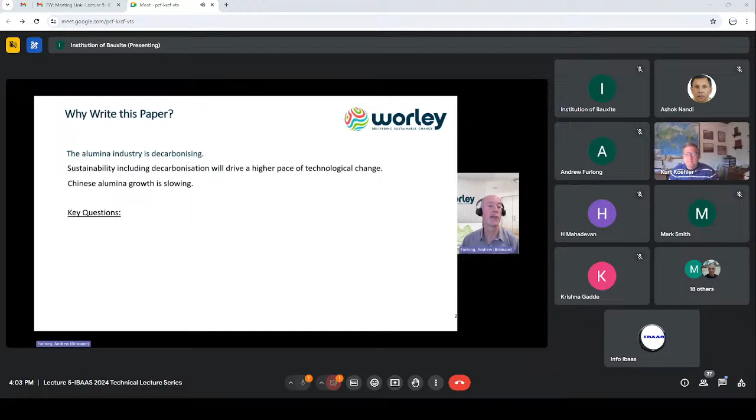And the second very significant trend is the huge growth that we've had over the last 2 decades in the alumina and aluminium industry in China is now slowing somewhat. Not that they're not growing, but it is slowing. So out of that posed two key questions we wanted to answer, which we'll try and cover today. They're very broad questions, in a fairly high level manner, given the time. And those questions are, in this context of decarbonizing and having production growth, what would your new refinery look like? And secondly, where should your new refinery be located?

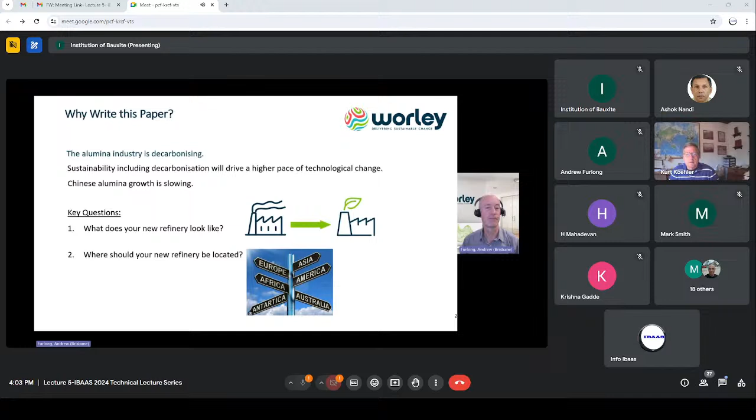A bit of context around the decarbonization, which we're all pretty familiar with, is that 2050 requires rapid global decarbonization, as per this graph here from the International Energy Agency, showing a massive drop-off in fossil fuel usage to 2050, particularly between 2030 and 2040. And it's similar when we talk about the aluminium industry.

The International Aluminium Institute has provided its own scenario that aligns with net zero, the 1.5 degree scenario, and that shows a huge fall off in emissions from the industry to 2050. Again, in that 2030 to 2040 period particularly, which I'm terming here Horizon 2, and that time frame, probably late 20s and early 30s, is probably the time frame of most focus for this presentation.

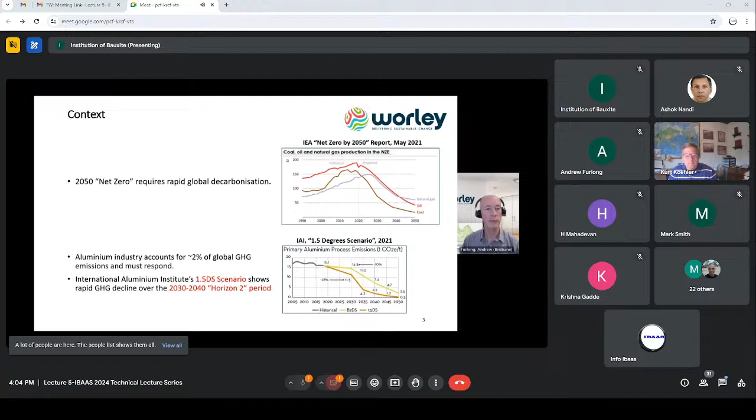So I want to do a little bit of looking back before we look forward. We're obviously trying to give some predictions overall here about the future, and so there's definitely some crystal ball gazing going on in this presentation, but we think it's not too far in the future, and it needs to be taken seriously for the decisions of today.

But back in 2018, only 6 years ago, Worley had a separate paper where we were speculating on 3 possible scenarios for what a refinery might look like 40 years from then, so in 2058. So a long way away, but the 3 scenarios were a business as usual scenario, where there's just evolutionary change that we're all used to, continuous improvement in technology; an energy center scenario, whereby refineries are moving to be located beside low-cost energy sources, in particular low-cost renewable electricity; or a local renewables scenario, whereby refineries are pushed to stay close to the bauxite mines because transportation has been decarbonized, but decarbonized transport would be very expensive, and therefore they just use whatever renewables are available locally to them by the mine.

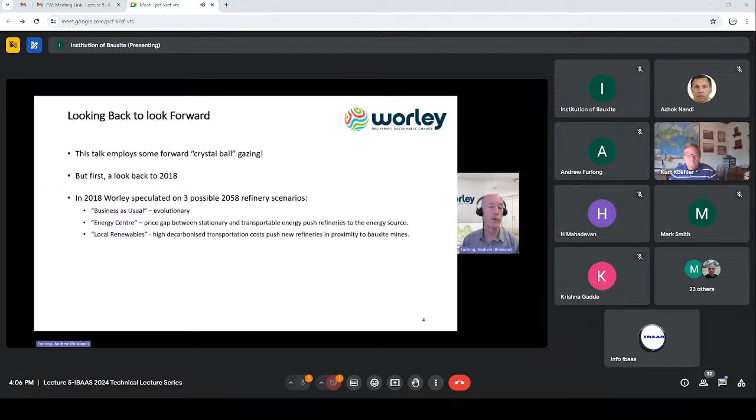So 6 years on, there's been a lot happening in the energy transition since 2018. There's been an acceleration. So what learnings can we take from that? What we see is that for each of those scenarios, we can see elements of them playing out, maybe less so the local renewables scenario, but there was an element in the local renewables about this driving batch operation of some parts of refineries, such as calcination and evaporation. And we see that's potentially possible in the future when we start electrifying refineries, as penetration of renewables gets very high in grids. But nevertheless, the energy center seems to be the more favored medium term.

And the reasons for that are, there's been the huge acceleration in electrification as regards the energy transition, the rollout of wind and solar, etc., is ramping up, and costs of renewables are ratcheting down faster than any other aspect of the energy transition. Also, concentrating industry in an energy center is very aligned to the large scale rollout of infrastructure that's going to need to be rapidly delivered to meet net zero by 2050. And thirdly, concentrating industry in one location is more aligned to reuse of waste products from one industry as a feedstock for another.

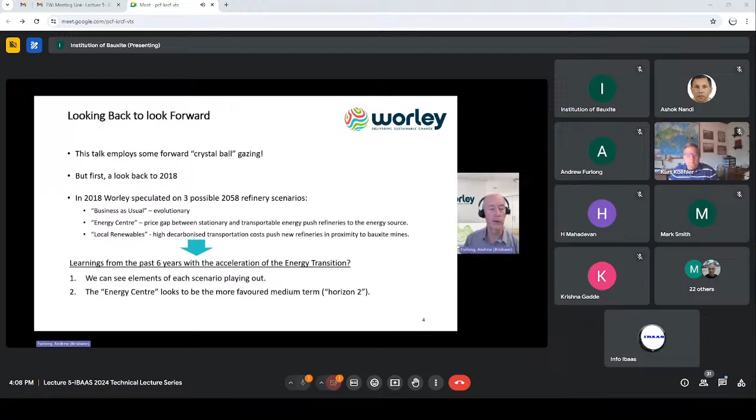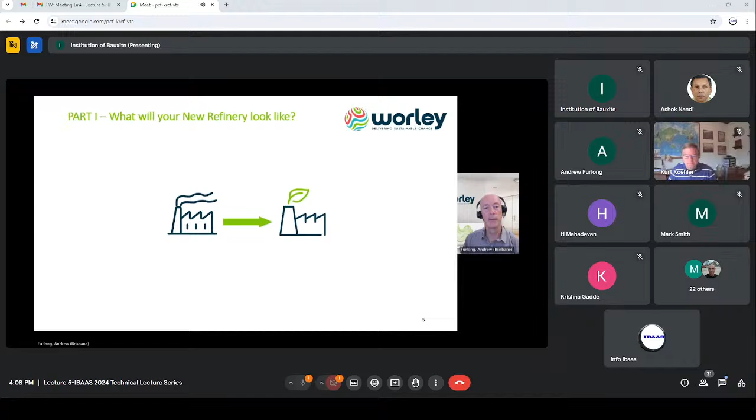So moving on to, let's say, part one of this talk, what will your new refinery look like in a production growth but decarbonized scenario? And first thing to say, despite all the talk we've already mentioned about declining renewables energy costs, overall, in an electrification scenario, which we see as the most likely, because of all the energy transition technologies, they're the ones that are going to be dropping in cost most, and we also see those technologies as having the greatest opportunity for

efficiency improvements. But despite that, what we'll see in the future, we believe that the alumina industry's energy bill is going to become a lot more important, and this is going to actually incentivize energy efficient technology. When I say a lot more important, what I mean is actually energy costs could double.

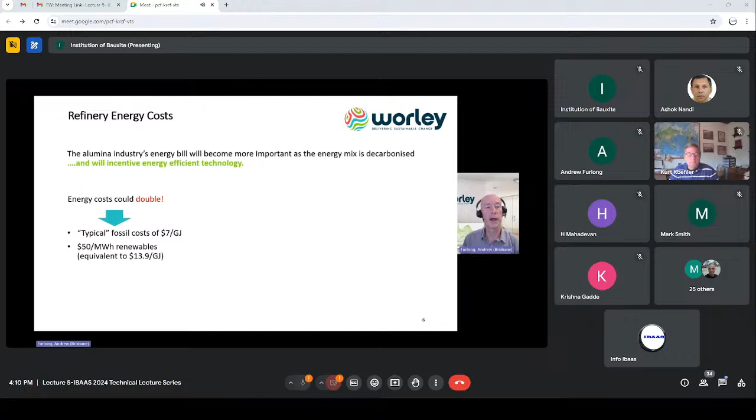And to put that in context, as an example, I've come up with a typical fossil fuel cost of $7 per gigajoule. There's no real typical cost across the industry because it varies by location, but to pick a line in the sand, I picked $7 per gigajoule, and then I compared that with a reasonable renewables electricity cost of $50 per megawatt hour, which is equivalent to basically $14 per gigajoule, which is double our $7 per gigajoule.

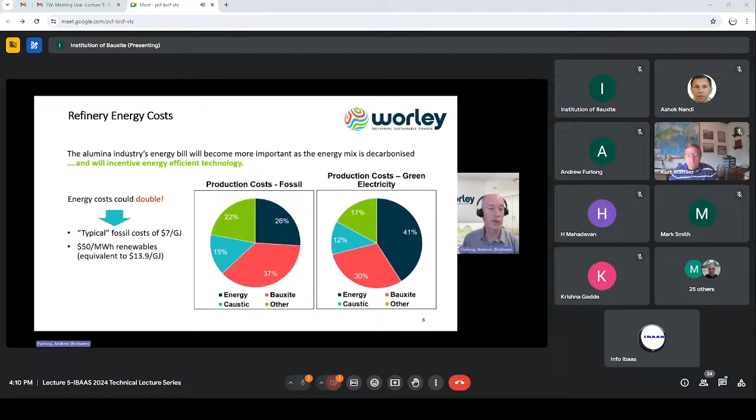And so what does that do to our production costs matrix? Well, production costs today in a fossil fuel scenario, I've come up with my own split here, whereby in black I've got the energy costs, also shown bauxite costs, caustic costs, and other costs. Of alumina production, about a quarter of the costs are energy costs. But where we have energy costs doubling, it jumps to over 40% of alumina production as energy costs. So obviously, we're going to be paying a lot more attention to it in the future, and it's going to be driving energy efficiencies.

So where are we heading overall with this? What we see is waste reduction and energy transition driving very significant changes in refinery technology, and that's going to dramatically alter the inputs and outputs to and from refineries. We're used to the historical setup with large amounts of fossil fuels, in this case coal and gas, being inputted, a lesser amount of electricity, caustic and water, bauxite inputs, and significant amounts of CO2 emissions, water outputs, and heat losses from a refinery.

But in the future, those fossil fuel inputs we see as being displaced by a larger amount of electricity as the energy input. The water usage will drop dramatically, water output will drop dramatically, heat losses will drop dramatically, and we'll see a lot of energy and waste heat being recycled within the refinery and residue being reused. Now, this chart on the right focuses on a decarbonisation scenario. I wouldn't be surprised to come back in 10 years and be talking about a lot of work being done on bauxite inputs to potentially reduce the bauxite input to the refinery, or even caustic. But that's for another day.

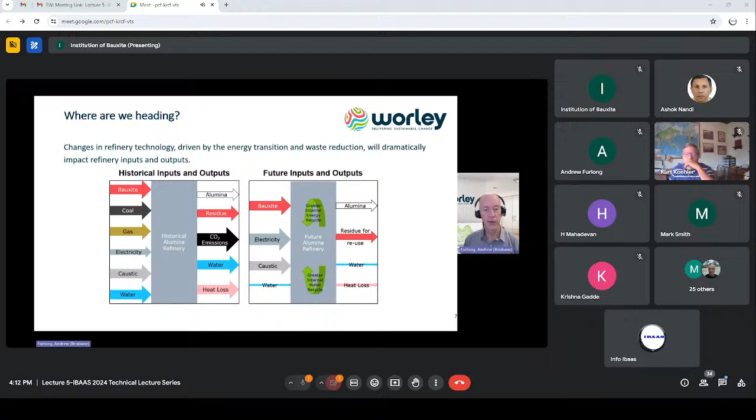Moving on from the last slide, getting a little bit more focus on one aspect of the energy to the refinery and where we are heading. I'm taking the example of process steam, which is of course the largest energy usage in a refinery. And what we see with the technologies that we're looking at, that process steam energy could reduce by over 70% compared to a typical refinery today, which I'm showing as 5.5 gigajoules per ton process energy usage, or around 60% versus greenfield best practice. And so that's huge energy savings.

And at the same time, that technology driving those energy changes can drive complete elimination of process steam CO2 emissions, and also an 80% reduction in refinery water consumption. So it's really a massive change, and this graph is showing that there's a series of waste heat recovery options available to refineries that, if taken advantage of, can dramatically drop the energy usage of steam, and in this instance, those technologies are electrification technologies.

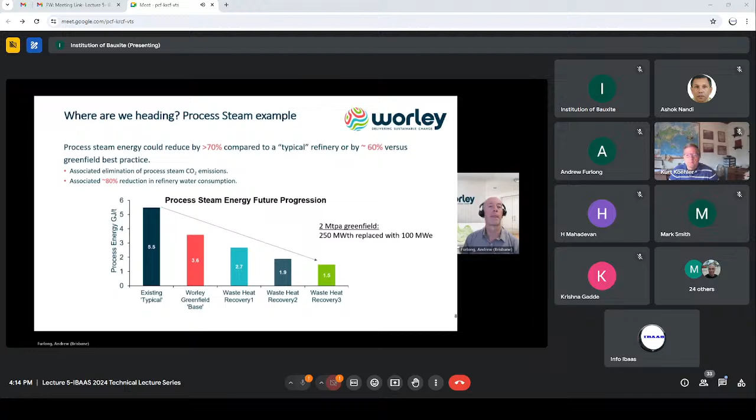I've tried to illustrate in this, there's many technologies that could come into this, so I tried to put them here onto one slide, animated slide at a high level, and I'm showing here a Bayer circuit where it's fed by steam as the energy source from our steam plant or boiler plant, but we've got waste heat being lost out cooling towers or out stacks and water associated with it. And we've obviously got a calcination process that also loses waste heat and water out of stack.

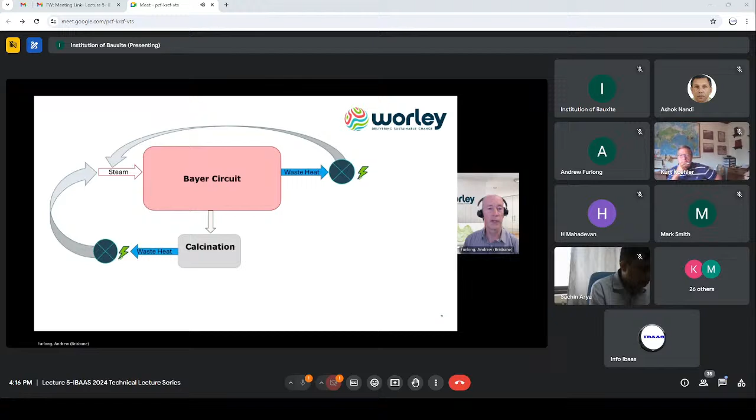But in future, we may not need this fossil fuel boiler, and we may not be losing that waste heat out through those sources. As a matter of fact, we will recover that waste heat via some means of vapor recompression technology, preferably electrically driven, and so preferably green electricity driven to avoid the CO2 emissions, and that will recycle that heat. Recompression will provide the steam to the Bayer circuit.

At the same time, we could see that pure high temperature refineries could become less common as they convert, or newer high temperature refineries become more double digestion style. Double digestion would be where you have a mix of low temperature and high temperature compared to just pure high temperature. And the reason for that is that these compression technologies for recycling of waste heat are more efficient and lower capex when they have to compress to lower steam pressures. So obviously high temperature refinery means high steam pressures. So that's why it's preferable to have a low temperature refinery when you're recompressing waste vapor.

And in actual fact, even for a low temperature refinery, this will favor single stream digestion versus dual stream digestion, where you have separate heating of liquor and bauxite slurry. For the simple reason that the steam pressures required in single stream are only about half that needed for dual stream digestion.

In addition, for security of energy supply and maybe to take advantage of some arbitrage in day-night electricity pricing, we could see some elements of long duration, large-scale energy storage being installed at refineries, electrically heated, and from the thermal energy storage, we could raise steam for the Bayer circuit, or we might just take the heat transfer fluid, let's say molten salt, and exchange that directly against the process slurry or liquor in the Bayer circuit. So again, not requiring an actual steam plant per se.

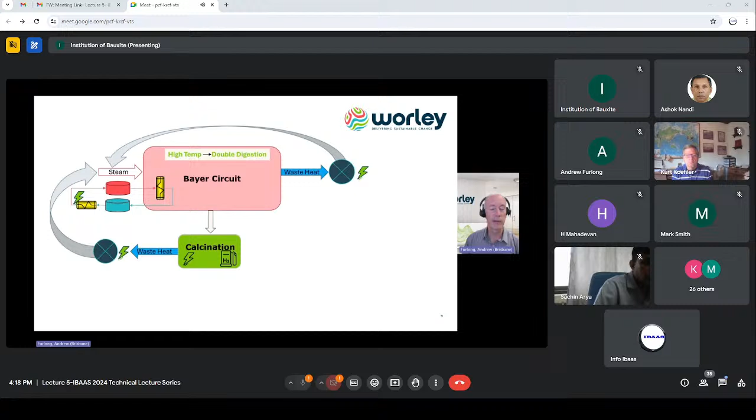Next up, we'll try and decarbonize calcination. Now, existing calcination plants, we may be able to retrofit hydrogen. It may be a while before hydrogen prices allow us to do that economically. Potentially, we can retrofit electrically. That could be more challenging. It may be able to be done as a partial retrofit, but a full retrofit could be more challenging.

On the other hand, there's already demonstration plants out there for a next generation calciner, electrically driven, and we think this is a very interesting future technology. There won't be any need for combustion there without a fossil fuel, so it also opens up different ways to envisage or reimagine heat recovery and heat optimization in the calciner.

And also there may be opportunity with these calciners to not necessarily be as constrained as the existing calciners are, having to operate 24/7. These calciners may be more flexible and able to start up and shut down more frequently. That might allow them to align better with variable renewable electricity, say day-night cycles, which will be interesting to optimize for electrical pricing, but also maybe allow hydrate storage as a cheap form of storage for those day-night cycles, and that might also allow for extra flexibility, some element of hot alumina storage.

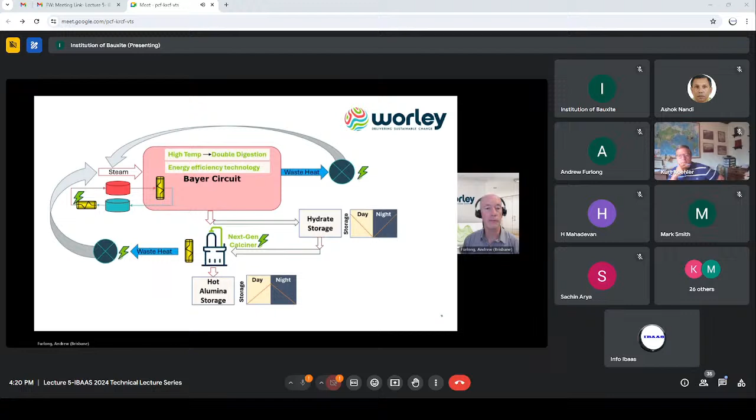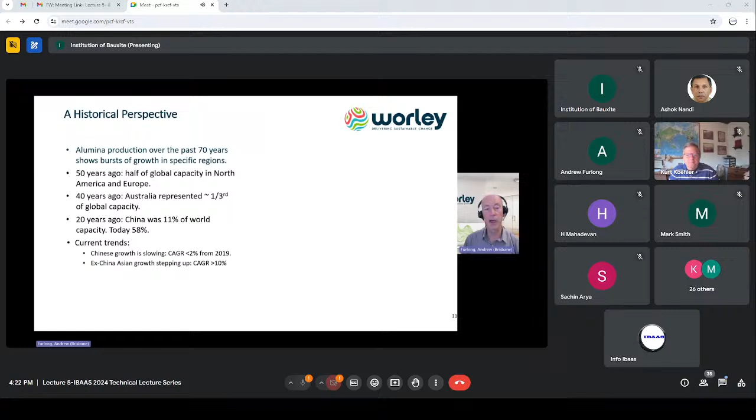So what's driving these bursts of growth that we've seen in different regions? Well, there's a variety of key drivers that affect the suitability of different locations. And really, it's the changes in these drivers over time that's led to the historical patterns that we've seen. And no surprises, the changes in these specific drivers is what's going to drive this in the future.

I've listed at a high level, the drivers are CapEx, OpEx, sales, you know, guaranteed sales for your alumina, risk, and strategic reasons. They can all be broken down, which I've attempted to do here, into a series of smaller bullet points. In risk, maybe not so important in prior decades, but ESG has now been added to the list of things like risk financing and geopolitical risk. ESG has obviously become a big item and will only be growing in decades ahead.

So some examples where these have played out: we've seen on the strategic side very strategic government support to underpin the growth in the Chinese aluminium value chain over the past few decades. Australia, where I'm based, that industry was really underpinned by low OpEx, bauxite and energy. But when we look forward, the future growth now appears to be hampered by high labor costs. And in Guinea, there's potential refinery activity on the horizon, but to date, despite the huge bauxite resource, there's been very little alumina production there. Obviously, the political risk has been a deterrent to date.

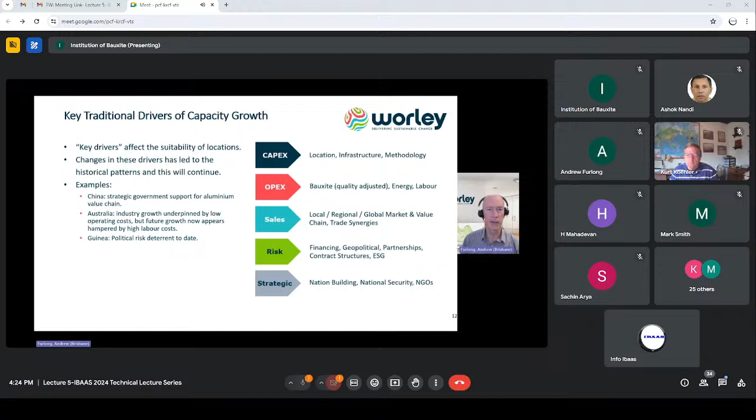And quite a startling statistic, I think, is that we're all familiar with the G7, those advanced economies. There's an equivalent group of emerging market economies called the E7, which are Brazil, China, India, Indonesia, Mexico, Russia, and Turkey. The E7 were half the G7 size in 1995, but by 2040, they could be double the size. And by 2050, 6 of the 7 largest economies could be what we term today emerging. So we can see that Asia, Africa, Latin America are the strongest growing regions.

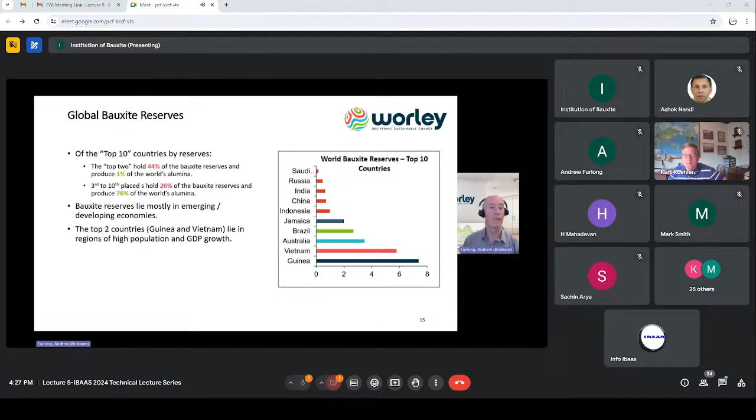So going back to how the energy transition might impact refinery location. Well, what we see is, and going back to the energy center theme, we see that new refineries will be more likely to be located in regions that offer those energy centers. So what I mean by that, they offer low cost carbon-free energy. And also, if they're near bauxite deposits, that'll be a huge advantage at the same time. So what this does, obviously, this provides an energy cost advantage while limiting bauxite transportation cost penalties.

Additionally, there's a lot of talk in the world today about supply chain needs, securing supply chains. So if these locations where the refineries are can also address regional supply chain needs, that will obviously make the opportunity more attractive.

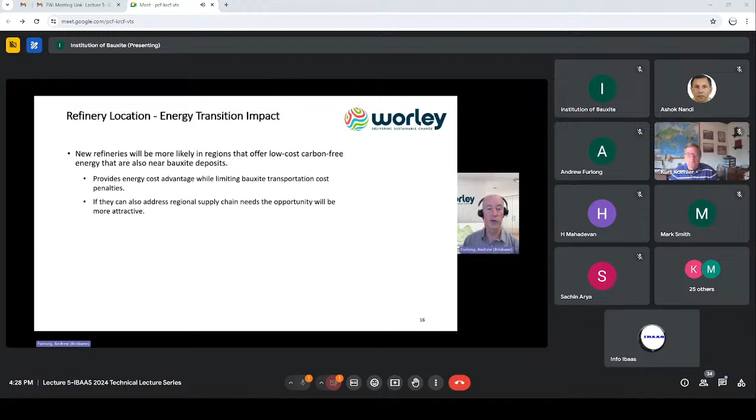So I've pulled this chart together. It's a chart showing the solar and wind technical potential in any country as a multiple of the energy demand. And it's divided the world up into those countries where it's super abundant, which means the solar and wind potential is more than 1,000 times the energy demand today. Super abundant or abundant, replete or stretched. And again, it really lines up quite well with the GDP graph, that it's mostly the emerging countries and the same regions that are coming out with the highest multiples here.

So really the message is the renewables opportunity appears strong in emerging markets. Now you might say for Africa, the reason why it stands out is because there's such a low energy demand today. But having said that, 39% of the global solar and wind technical potential actually lies in Africa. So that actually demonstrates the opportunity there.

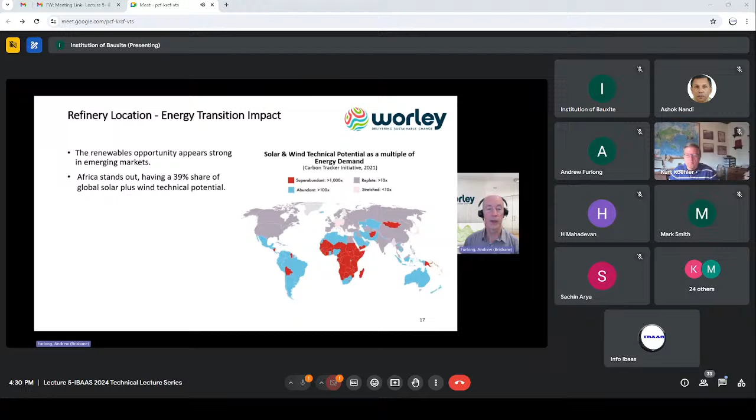So I'm just coming to a few charts here at the end of this first presentation, and really when we put those drivers that we were talking about before together, that drive the location of a refinery, they come up with what we're terming here a recipe for a refinery location, and they combine to create a recipe for development in any given country or region. So I've put together some subjective examples of what that might look like in the future for certain countries and regions. They're not precise. They're just, as I said, subjective. And I welcome anybody here to try this for themselves and see what numbers they come up with.

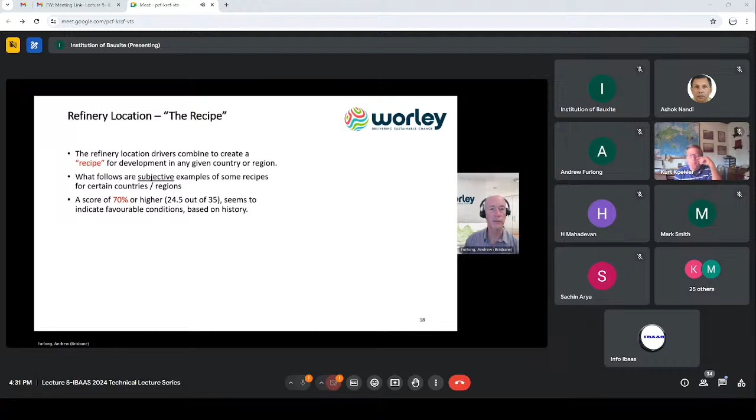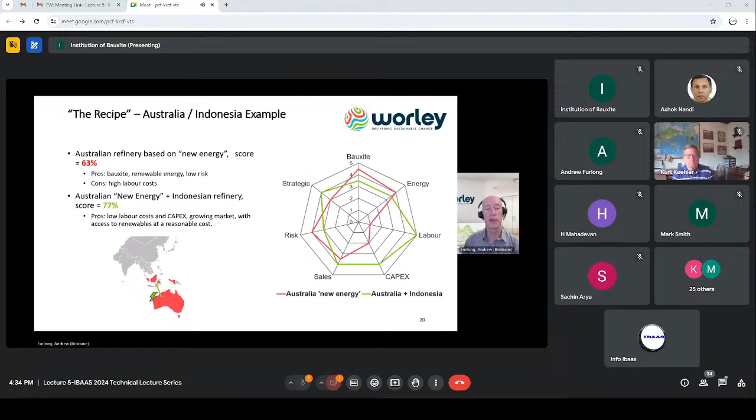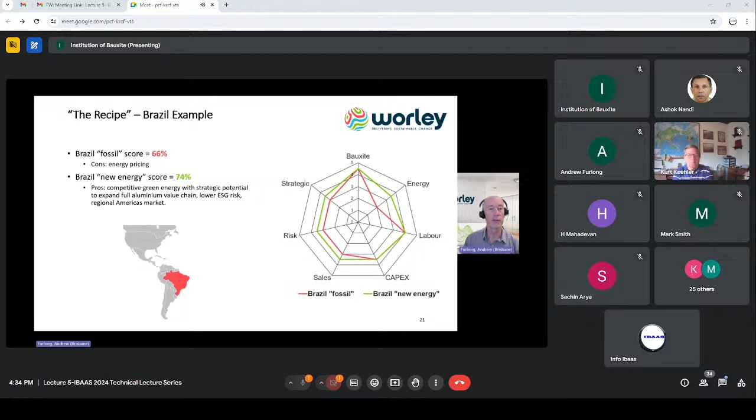Brazil is quite well endowed with green energy, so it'll be very competitive. And actually that drives maybe strategic potential to expand more into smelting and open up the full aluminium value chain. Obviously lowers future ESG risk and might open up more the market for providing low carbon alumina and aluminium into the Americas. Finally, I have included India here.

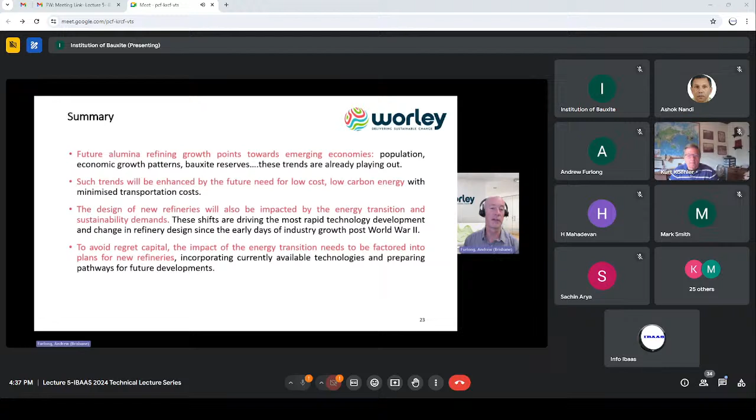I'll now continue with a few slides on the technical piece on evaporation retrofit with mechanical vapor recompression, a pathway to decarbonisation. I'd like to thank Brad Hogan, my colleague, who put these together.

So the summary from this slide is really that, as we all know, most of the energy in an alumina refinery is on process heat, whether it's as steam or calcination, which makes the carbon emissions hard to abate. So with that comes some challenges, because if we do have to transition to a different emerging technology, that might have some uncertainty and some technical risk.

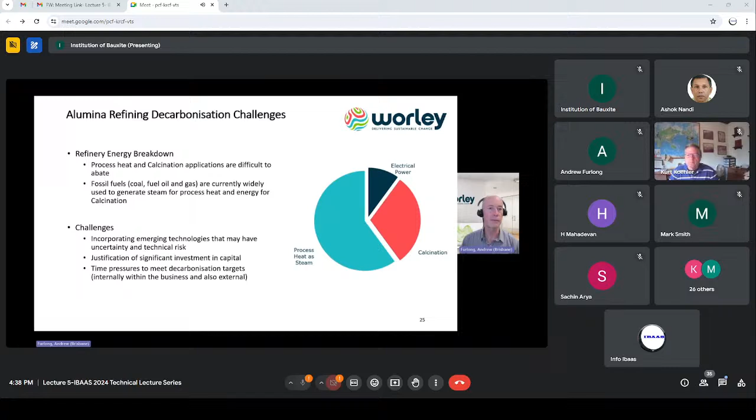And with that, there's always a justification if there's going to be an investment in capital. And depending on the company's commitments or the country's commitments, there also could be some very strong time pressures to meet the decarbonisation targets. And with that, we see a variety of different decarbonisation pathways that could be taken by refineries.

The MVR focuses on electrification, taking advantage of low-cost renewable electrical energy, which we see as the prime pathway because of the potential for energy efficiency with that pathway and the rapidly dropping cost of renewables. Another pathway is to modify the flow sheet of refineries, which I hope I covered a little bit in the last presentation, adapt the flow sheet to enable some of these technologies to take root.

We can transition to e-fuels, such as green hydrogen. So just basically put green hydrogen in the pipe instead of natural gas, or we can do a carbon capture solution on our existing fossil fuel boilers.

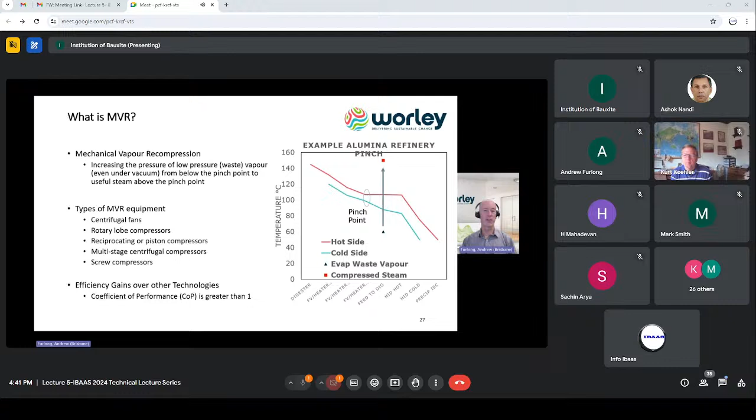And for this application, we're probably talking typically a coefficient of performance of 3, 2.5 to 3.5. So for the amount of work or energy put in, we're getting 3 times the amount of heat out. If you're looking at an electric boiler, it's actually less than 1, let's say 0.96 efficiency. So there's a massive improvement with these technologies.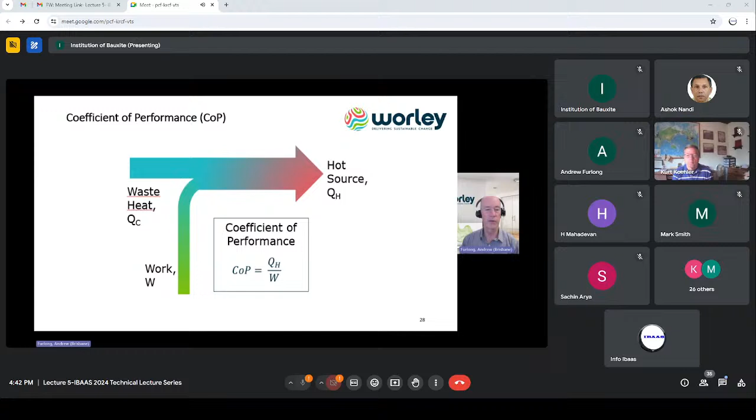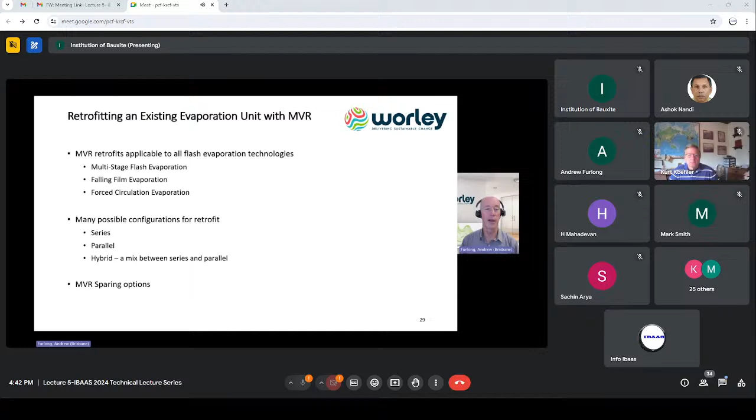How applicable is it to retrofit an existing evaporation unit with MVR? Well, actually, it's applicable to all types of flash evaporation technologies, whether it's multi-stage flash evaporation, falling film evaporators, forced circulation; it's applicable to them all, and it can actually be done. There's a variety of different ways we can retrofit these evaporation units, which we'll touch on now: in series, in parallel, or hybrid, which is a mix between the series and parallel. We'll also talk a little bit about MVR sparing options.

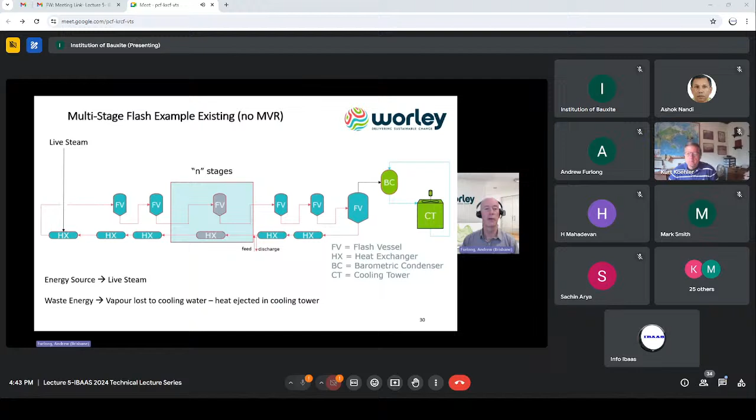So this is basically a diagram of a multi-stage flash evaporation unit as it looks today with no MVR. We've got our flash vessels and our heat exchangers, going up to our live steam heat exchanger, heated by live steam, comes back down, flashes from our flash vessels over many stages, and at the end it goes into a barometric condenser and we've got a cooling tower. Waste energy is lost to the vapor, it goes into the barometric condenser, and we've lost it to the cooling water here.

Now, in terms of a series retrofit of MVR to that evaporation unit, we're actually going to drop the live steam input source and we're going to drop the cooling tower. What we're going to do is take the waste vapor from the last flash tank and put it into a series of large fans operating in series and recompress that vapor from the low pressure end all the way up to the high pressure end into the live steam heater.

So our energy source becomes electricity. We need a little bit of live steam from another place for startup, but otherwise it's electricity. We have minimal configuration changes to the evaporation unit, but we have this train of compressors we have to fit in, several large fans in series, let's say between 5 and 8 large fans in series.

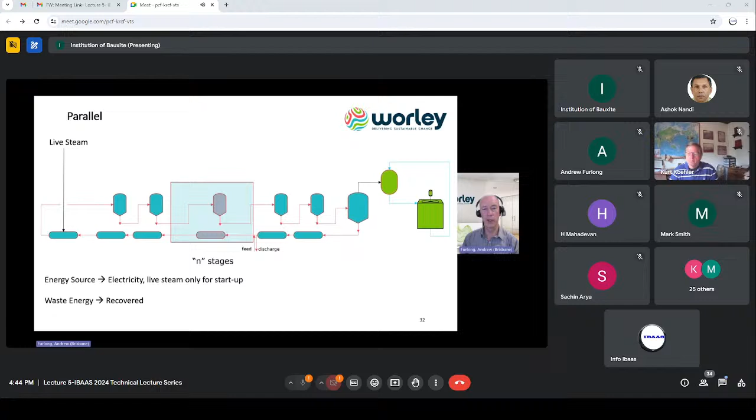When we come to the parallel retrofit scenario, it takes a different approach, but again, we're changing our energy source from live steam to electricity, and we'll be recovering the waste energy and not requiring the cooling tower or barometric condenser.

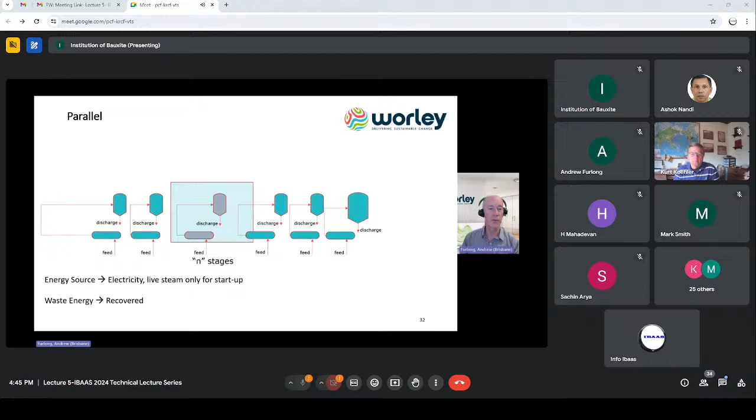So there's a bit of reconfiguring here, but basically in this scenario, each flash vessel and its associated heat exchanger will be operating independent from all the other flash vessels and their heat exchangers. The feed to evaporation will come into each flash tank heat exchanger pair, and the evaporated liquor will discharge from each flash vessel heat exchanger pair. So they'll all operate independent of each other.

And we will take the vapor from each flash vessel and with two smaller fans recompress the vapor back into the heat exchanger. And there will be, not shown here for simplicity, a recycle pump that recycles the liquor at a large volume through the heat exchanger and back into the flash vessel. So they all operate in parallel. We've got 2 stages of fans on each flash vessel, one to overcome the boiling point elevation, and another one to provide the driving force for the heat exchange.

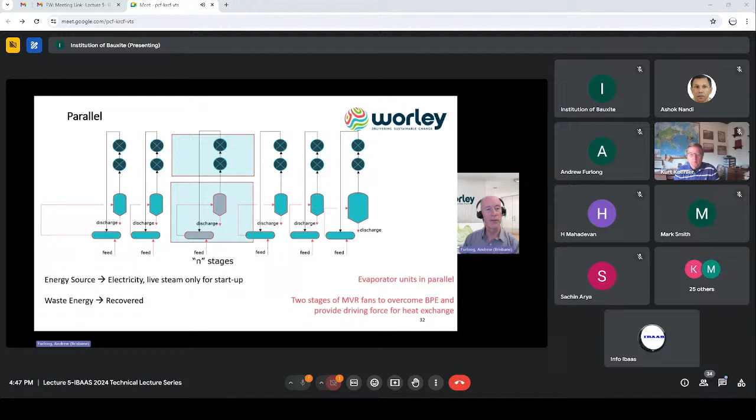With this scenario, we obviously have less fans in series, and there is some potential optimization over the series one in that all the liquor is coming in at the same temperature, and the evaporation is all done at a lower temperature that avoids some of the scaling issues that we see at the hotter end of evaporation. And it's likely because we have less stages of compression that the actual coefficient of performance could be higher in a parallel configuration compared to series.

In terms of sparing and availability on the series or the hybrid scenario, if there is a problem with one of the fans, we would just revert back to using the barometric condenser and cooling water as a standby. Overall, we think the MVR availability on the train of fans will be higher than 90%. So let's say the electrification benefits would be achieved more than 90% of the time, and we don't see it worthwhile to invest in additional spare MVR compressors and associated valving and piping.

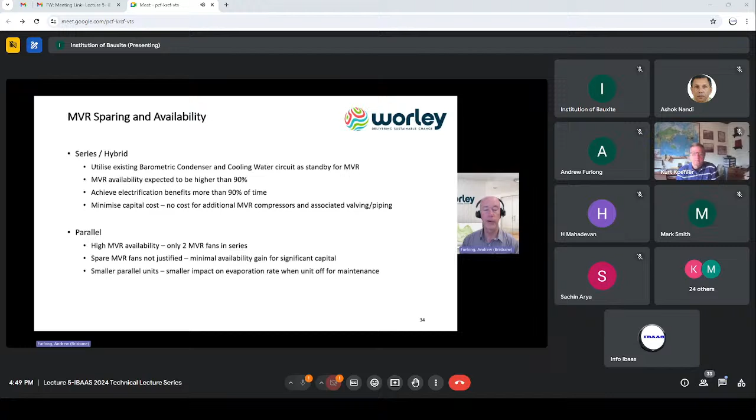For the parallel, it's a similar story: we get a high MVR availability because we only have 2 MVR fans in series for each flash heat exchange pair. We expect the availability to be very high, and so we don't see spare MVR fans as being justified. It's minimal availability gain for a significant capital. And yes, if one of the flash vessels does need to come off because there's a fan not available, it has a small impact because it's just one of a number of different parallel units operating independently.

In terms of retrofitting, why retrofit existing evaporation units? Well, we're actually utilizing most of the existing asset. We're utilizing the flash vessels. We're reutilizing the heat exchangers. So we're minimizing capital spend. We're using known and proven technology in fans. There are some potential concerns over vapor quality, happy to take some questions about that, but through vapor scrubbers, demisters, desuperheating water, etc., they can be mitigated. And we see it as an excellent initial step for transitioning away from fossil fuels for steam raising.

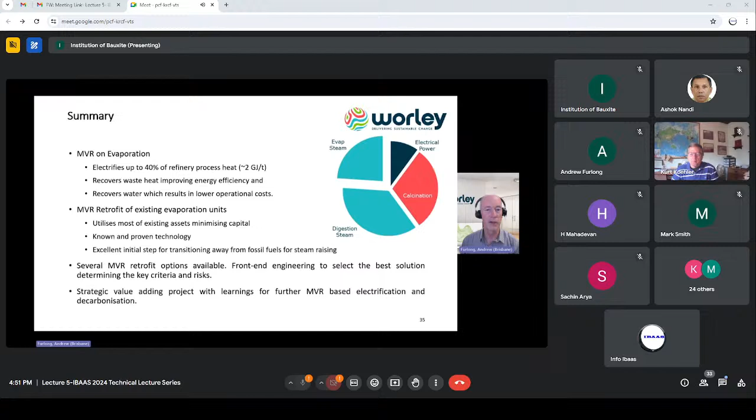And before you move into a retrofit, it's good to identify, of the different options available for retrofitting, whether parallel, series, or hybrid, which is the preferred option with the best economics. It's going to be different for different setups, and some front-end engineering study is required to select the best option and maximize the economics.